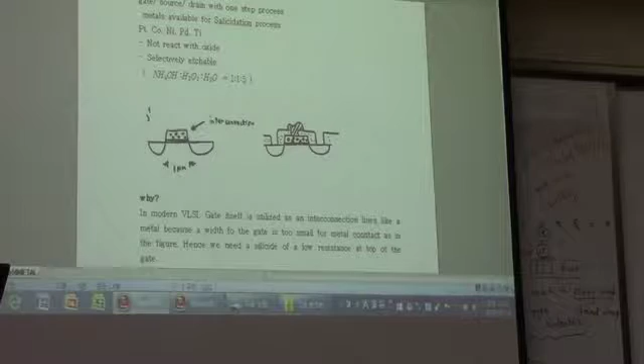Okay, the silicidation is a process that - is it clearly shown here? Yeah.

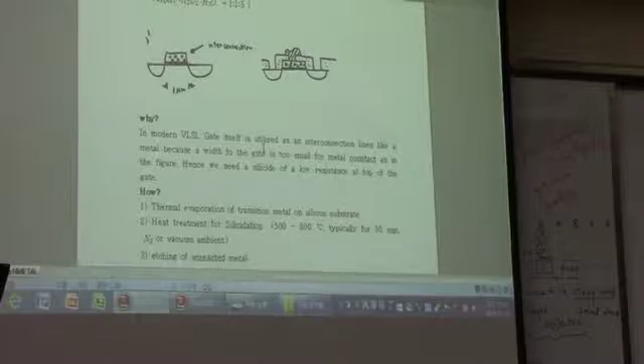When you form a silicide, the way to do this is you already have a source and a drain and a gate, something like this. And then you are going to have contact holes by forming interlayer dielectrics like this. And you're supposed to form a silicide just on top of this silicon surface.

Normally, what you have to do is deposit a metal film after forming things like this - let's say this is silicon oxide - and then you deposit the metal film, and then you etch those things to get patterns to cover these contact holes only. And then you put that specimen into the furnace, like 900 degrees centigrade or so, to form the reactions.

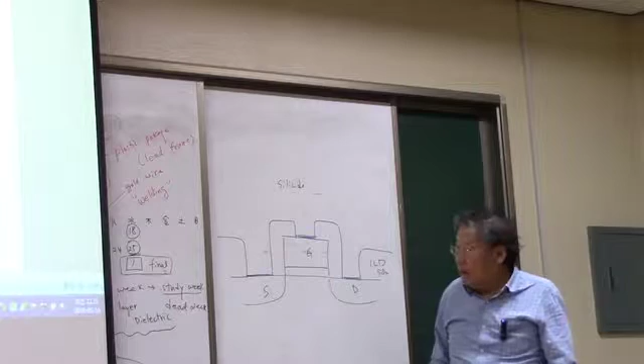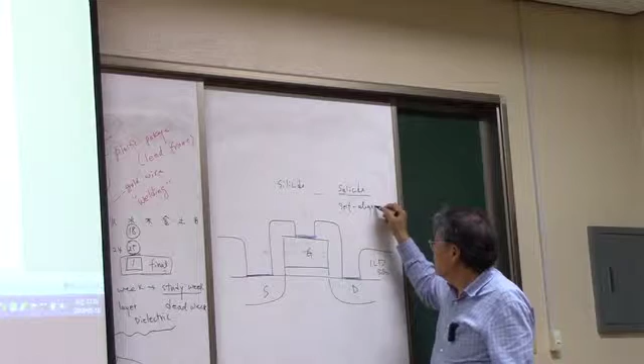To form a silicide. But in salicide, what you do is salicide - this is a self-aligned silicidation.

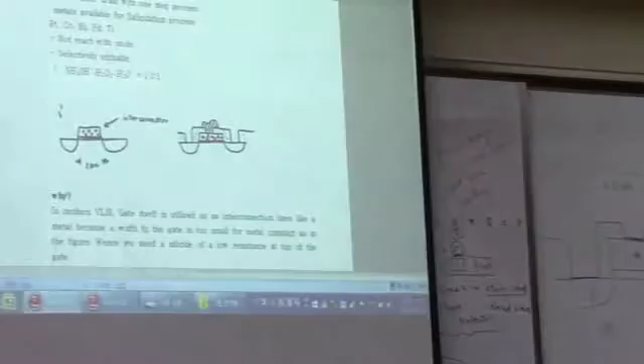You do not do the lithography after the metal deposition. Some of the materials, platinum and others, have been listed here. This silicidation is not available for other elements but platinum, cobalt, nickel, palladium, titanium. Only these 5 elements can do the silicidation process.

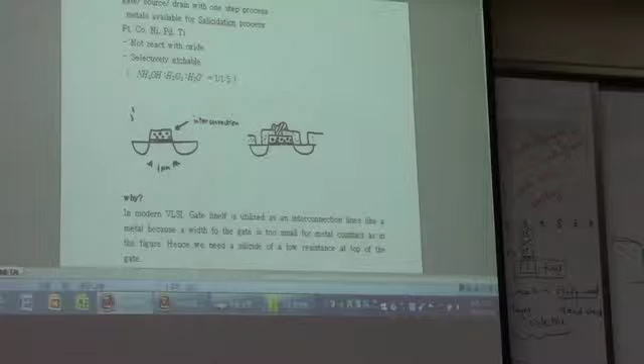And in the silicidation process, you just cover those metals on top of this whole thing, and then you do not do the lithography. You just put it as it is into the furnace at 950 or 900 degrees centigrade. Then only those 5 elements react with the silicon.

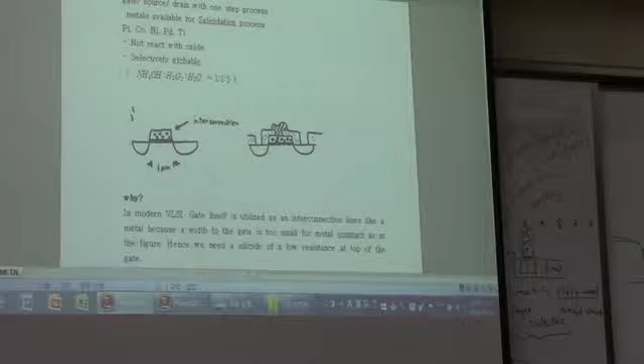And the metal film which is deposited on the ILD, the silicon oxide, is not going to react with anything - it's not going to react with the silicon oxide. So you just put it as it is in the furnace, and after the reaction, you just etch the metal.

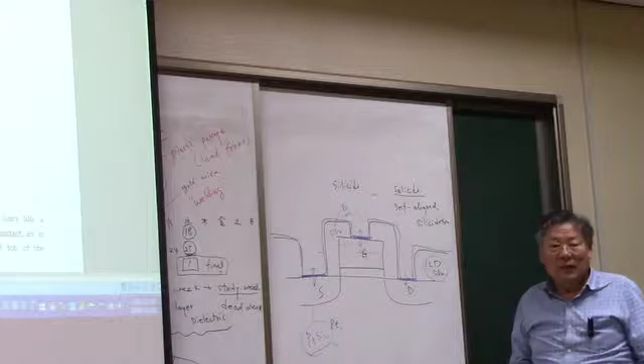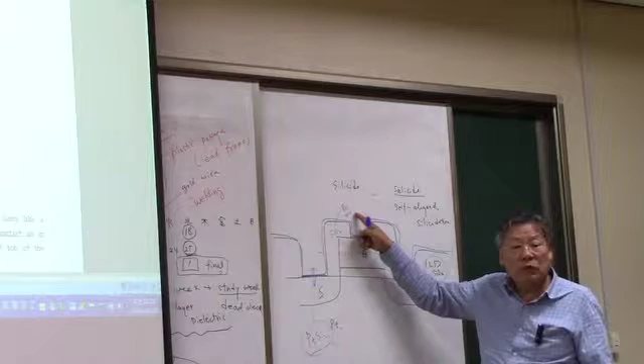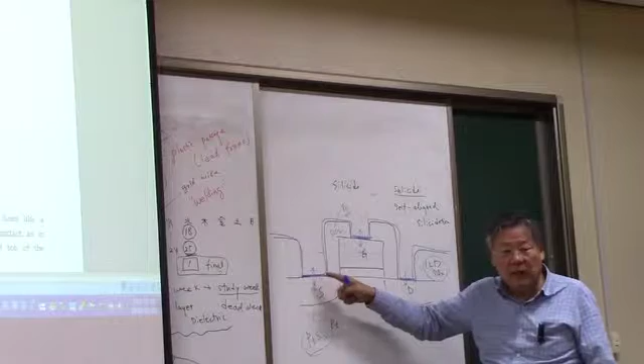Then the platinum, which is sitting on top of this silicon, is going to form platinum silicide. And the platinum which is on top of the silicon oxide just remains as platinum. So if you put this thing in the etchant - wet etchant - then this platinum silicide is not going to be etched. Only this platinum is going to be etched, so that it has a self-aligned silicide.

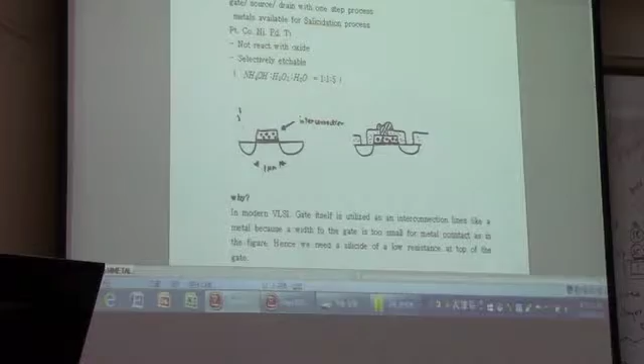In other words, only the contact holes are going to form the silicide. That's very much necessary for modern devices, because in modern devices the contact holes are very small, very narrow, and we do need this self-aligned process.

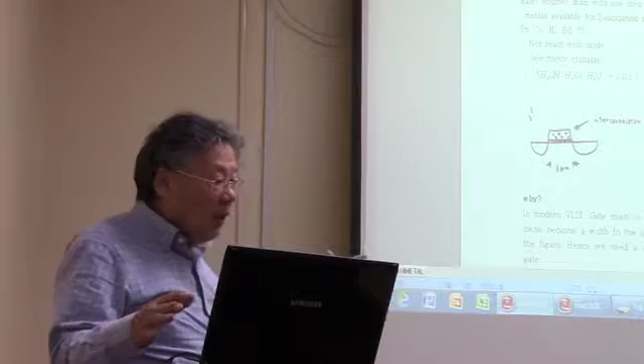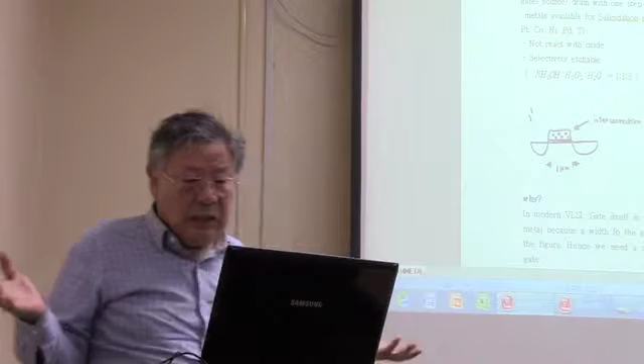That's why in most VLSI processes they use titanium and cobalt. Nickel may react with other elements, so it's a contaminant. So we mostly use cobalt and titanium.

So why in modern VLSI is the gate itself used as an interconnection line like a metal? Because the width of the gate is too small for metal contacts, as in the figure. And how - thermal evaporation of the metal film on the silicon substrate.

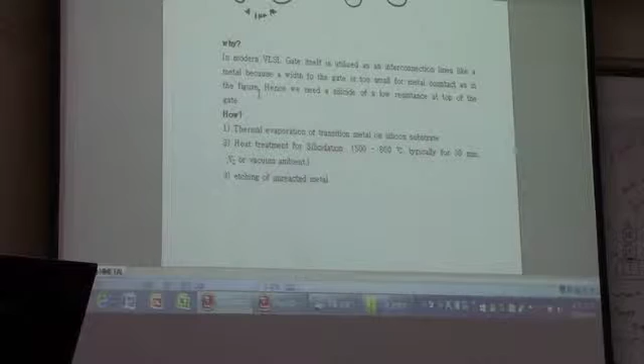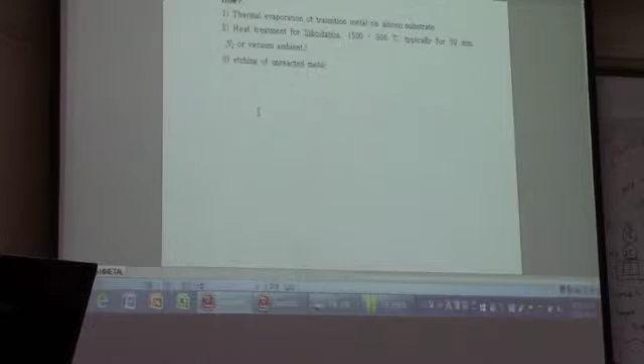We use evaporation because the thickness at this time is not that important, and that is the easy thing to do. So we do just the thermal evaporation and heat treatment for the silicidation, and etching of unreacted metal which is sitting on top of the silicon oxide and things. So this is the process.

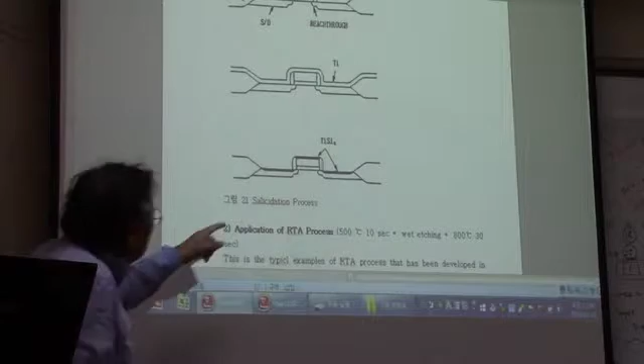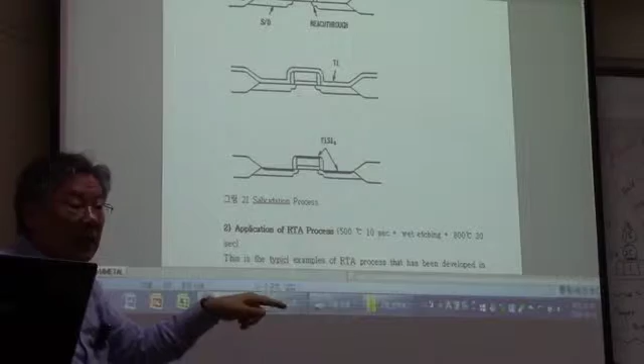And then in a self-aligned manner you have titanium silicide like that. You can notice that we have a spacer here - we have discussed this, right? In anisotropic etching, in RIE etch for example, we can have these spacers automatically. We are not going to do the silicon oxide here.

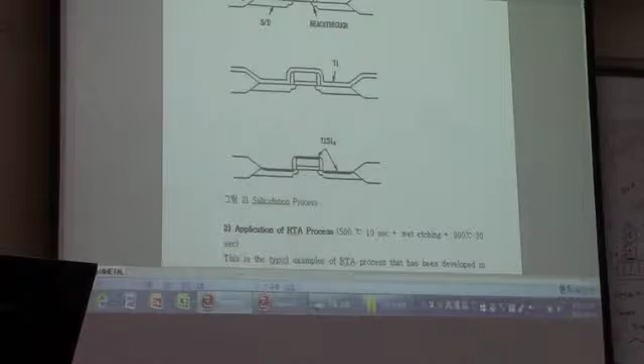Now in a silicide process, you have to have - let me go a little bit more detailed on this. When you form interlayer dielectrics like this, in modern devices the gate length is sub-micron, about 1 micron or something, and 1 micron is very narrow.

And then, as I draw here, if you form contact holes on the gate like this, then this distance is less than 1 micron. And it's very difficult in lithography to define a width less than 1 micron.

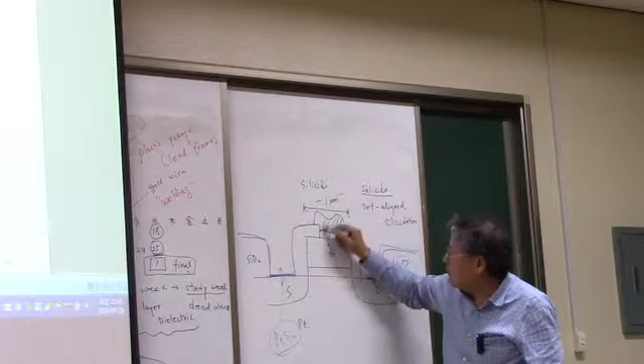So we usually use this gate as interconnection lines. We do not form metals on top of this gate for another interconnection lines like this. It is very difficult. We have to use this gate directly as interconnection lines.

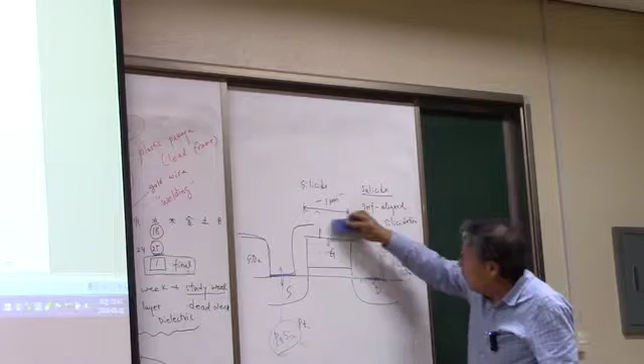It is very difficult to define contact holes on top of the gate, because the gate is already very narrow, right? So what you do is in a silicide process, you deposit all the metals as is, so that the metal is deposited something like this, in the silicide process.

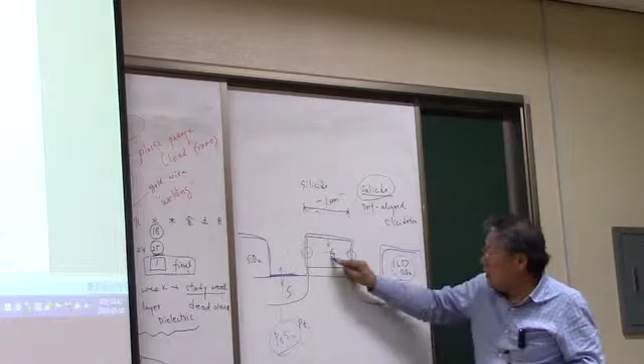Then this also forms a silicide, and then it becomes short. This drain and the gate or the source is going to be short with these side reactions of the metal lines on the wall of the gate, right? So it is inevitable, it is very essential to form a dielectric layer, a silicon oxide layer, like this, to prevent the short.

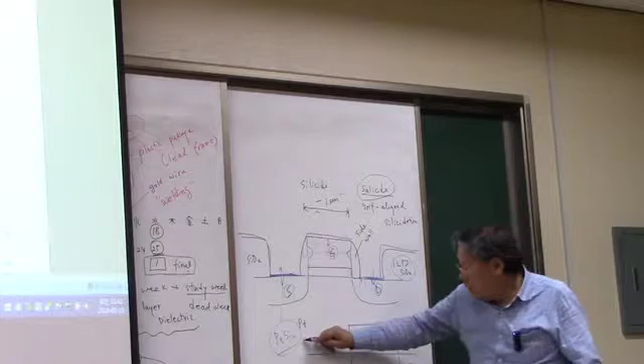So this is the sidewall. We have to form that. And fortunately, to have this sidewall, what you do is, when you have a source and drain and gate like this, you deposit the silicon oxide to some thickness, and then the silicon oxide is formed like this, right?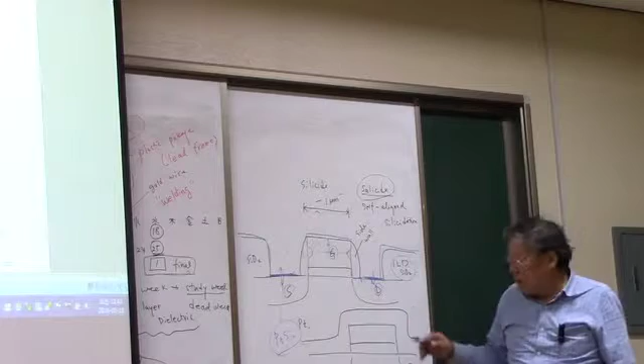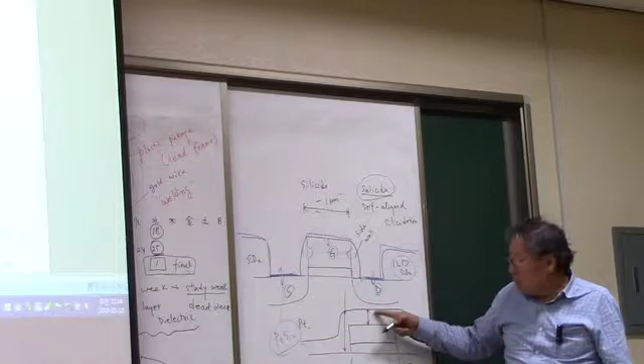And then you do the dry etching, anisotropic etching, so that in these directions you have to etch this much, while for this you only etch this distance. So this is much thicker than this, so that after anisotropic dry etching, in RIE and so forth, this all gets etched away except this residue. We call that residues.

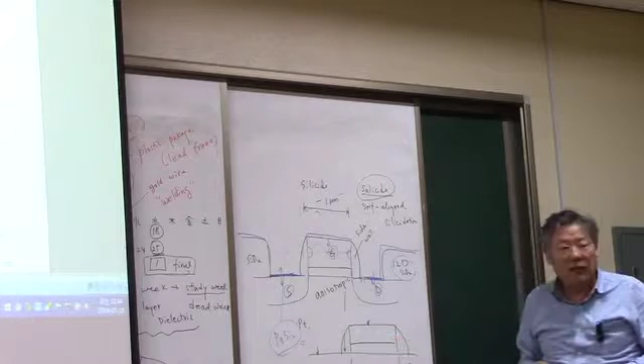So this is the way to form sidewalls. It's just an automatic process. You don't need any mask for this. And then you deposit the metals, blanket deposition. We call that blanket deposition, and put it into the furnace.

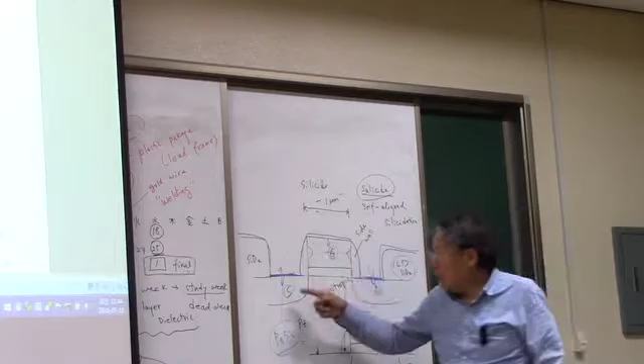And then after the reaction, this oxide will prevent it from forming a silicide along the sidewall of the gate, so that it can prevent the short.

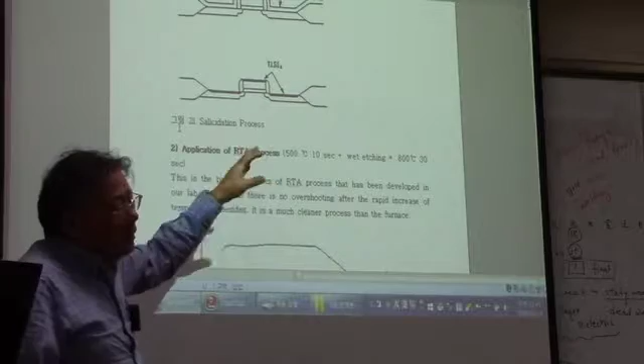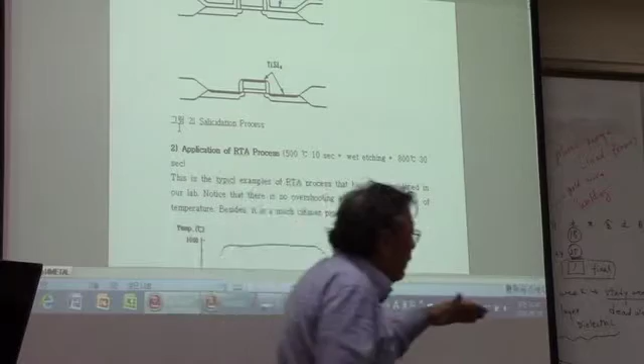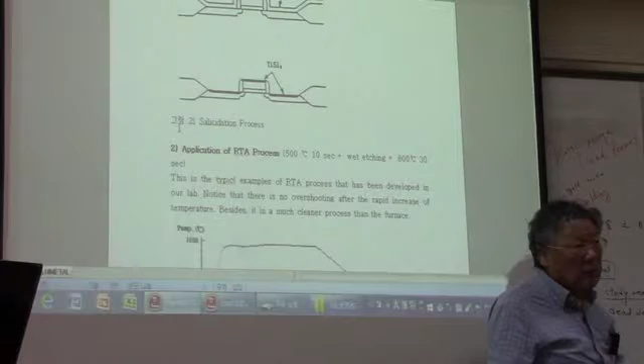Application of the RTA process. As you can see, this silicidation process just needs a temperature for the reaction, and the material needed for the reaction is not that much. A very thin film of platinum, cobalt, nickel, or such metals, with thickness of only several hundred angstroms. So when those metals are deposited and you heat it up at 900 or 950 degrees centigrade, then the reaction happens in a minute.

So because the metal layer thickness is not that thick, the product, the silicide, is not going to be thick. It's about 100 angstroms or so.

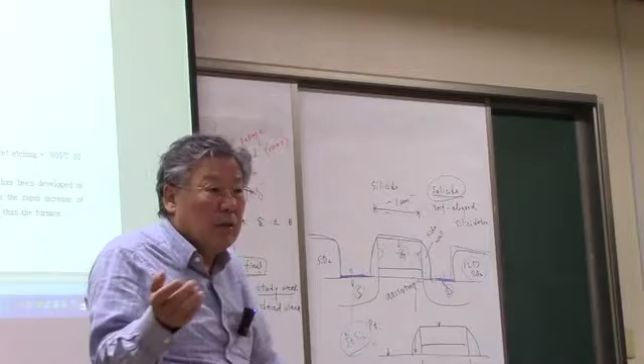So in practice, in the industry, they use RTA, rapid thermal annealing, for the silicidation process. The RTA process uses a halogen lamp to heat up the substrate, and this is the temperature profile that has been developed in my lab. As you can see, at room temperature, it can go to around 950 degrees centigrade within 5 seconds. This is the temperature of your sample.

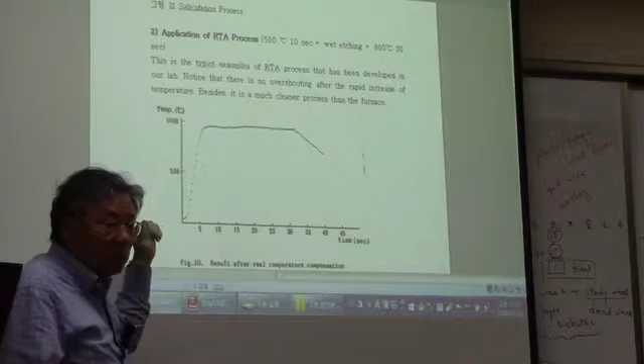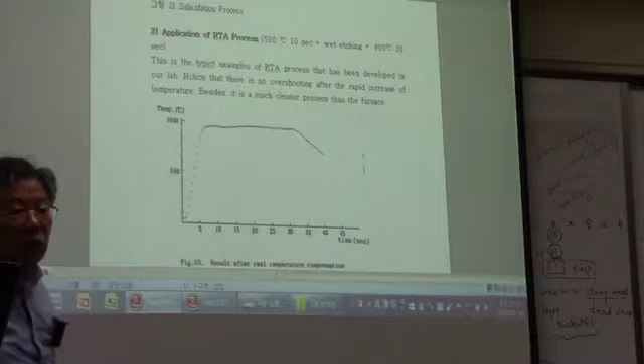So within 5 seconds, from room temperature, it can be heated to 950 degrees, and it stays there for about 25 seconds or so, and then you just air cool it. With less than 30 seconds total, that's enough time for the silicidation reaction.

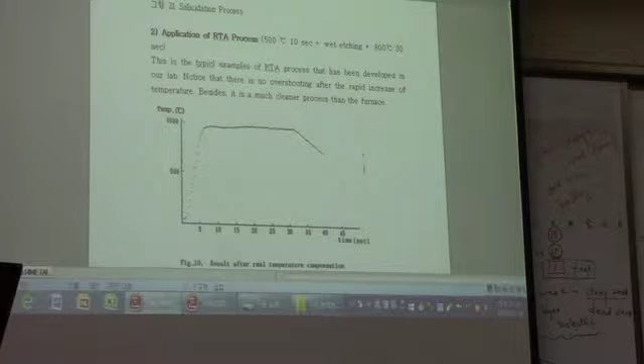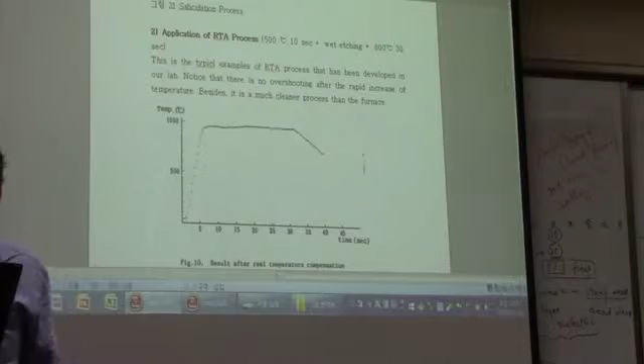So this is very powerful. It's a clean process, and you don't have to spend time heating up your furnace. In the furnace, you have to spend a lot of time to reach 950 degrees centigrade from room temperature. So the whole process is clean and simple, and this is a computer-controlled process.

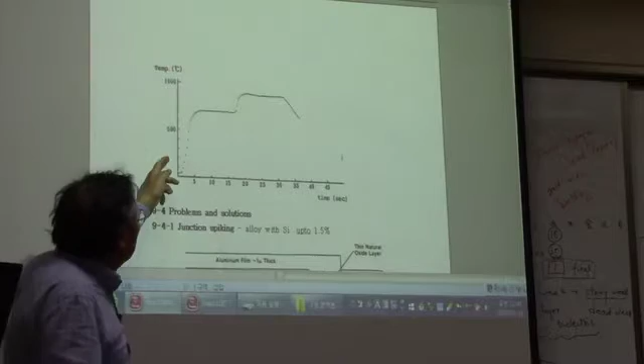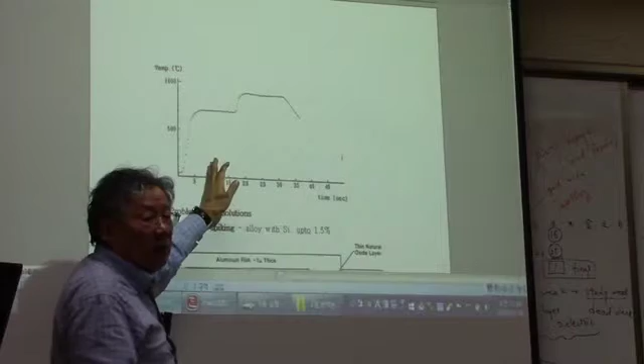It's a two-step process. You may need 700 degrees centigrade the first time, and then you heat it up to the higher temperature for a short period of time. This is some kind of incubation time, the preheating we call it, and then this.

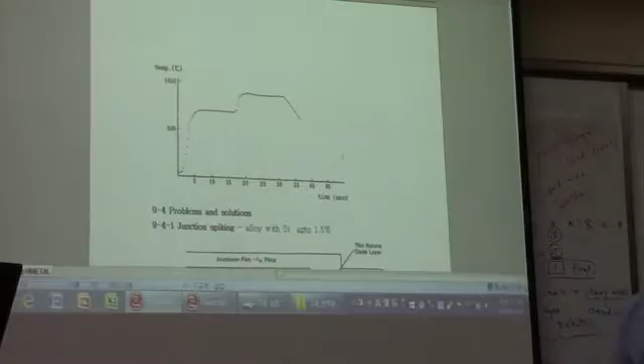For rapid RTA, the most important part is to kill the overshooting. Overshooting means if you heat up your sample too fast, then the temperature profile overshoots. So this we call overshooting.

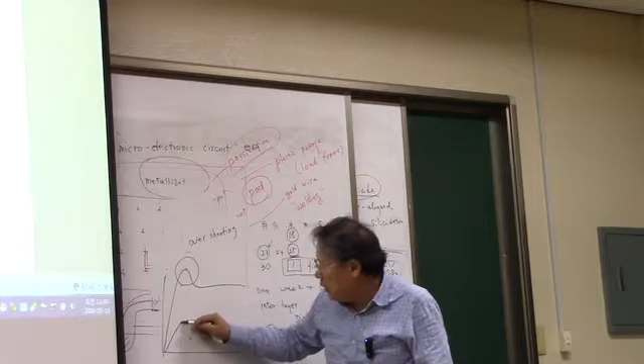In order to reduce the overshooting, this slope has to be slowed down. Then you can decrease the overshooting, but the time required to reach the temperature is long. So that is the drawback.

But if you control the temperature with a computer, then you can optimize this temperature profile. So this is the result of the optimization of the heating process in our system.

Well, let's talk about these problems and solutions.